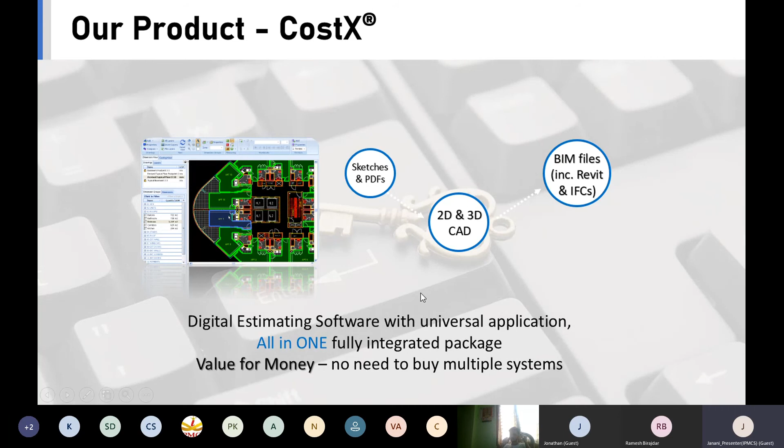Now we'll see a glance of CostX. iTWO CostX is a flagship product of RIB, a complete 2D and 3D BIM estimating solution. CostX is a digital estimating software with universal application. We can call it an all-in-one single integrated platform solution, because here we can combine our complete estimation work right from quantity takeoff, creating rate buildups or rate analysis, towards the estimate. CostX supports both 2D and 3D files. Features of CostX include 2D measurement, BIM takeoff, auto revisioning, estimating workbooks, and report writer.

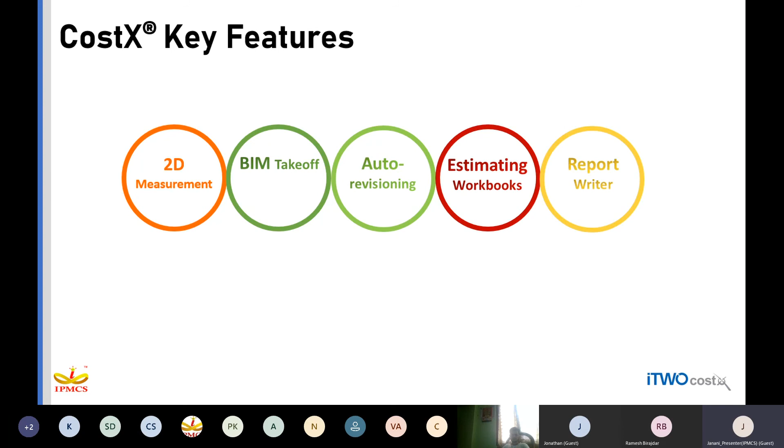CostX is a complete solution which is compatible with other tools also. First we'll see about drawings. CostX supports both 2D and BIM models for our quantity takeoff. For 2D drawing, CostX supports PDF files, AutoCAD files, and image files such as JPEG, TIFF, PNG, GIF, etc. For BIM models, CostX supports two extensions, IFC and DWF. In addition, RVT file is also supported in CostX, which includes models from ArchiCAD, Tekla, MicroStation, Revit, Navisworks, SketchUp, etc. So these files are supported in terms of 2D and 3D models.

Once we are done with our estimate, the same estimate can be exported to Excel, and we can also generate a report which is exportable to PDF, RTF, HTML, image files, CSV or Excel file. When we want to prepare an estimate, we can prepare a rate library inside CostX, which can be automatically imported from Excel. So if we have our complete project rate list in Excel, that can be automatically imported, which will be helpful for preparing our estimate. CostX is a complete estimation solution which helps us to streamline our process from the initial conceptual stage of estimation till the handovering stage.

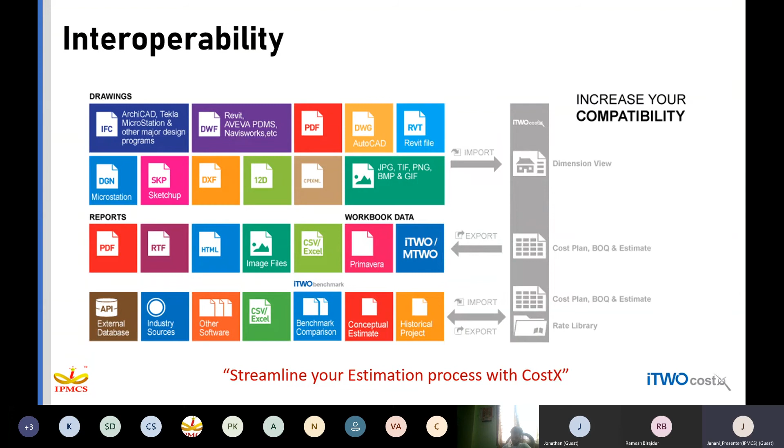Today's topic is earthwork volume, how to calculate earthwork volume in iTWO CostX. We have different methods of excavation which depend upon the type of project and type of soil. Some categories are pocket or borrow excavation, useful for foundation, mass excavation for a larger area, trench or channel excavation, rock excavation, underground excavation, and topsoil excavation. Today our focus for calculating earthwork volumes is going to be with mass excavation. If we are going to do mass excavation, we'll cover two different ways: one is using the grid line method for mass excavation, and another one is using the slope cutting method.

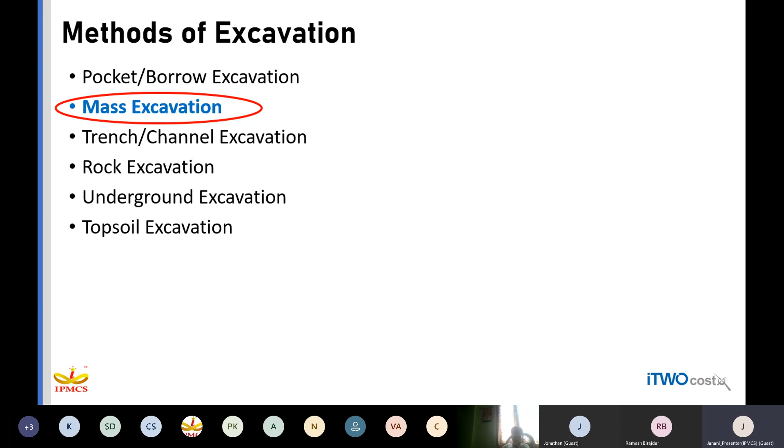First, we'll see about the grid line method. When we are going to do our mass excavation using the grid line method, we'll receive our drawing, which will display our complete site information with contours, which depicts the topography of the ground level of our site. In addition to the topographies with contours, we'll also get information such as grids. Our site layout will be bifurcated into different grids with different sizes, which will depict the ground level at each and every different RLs.

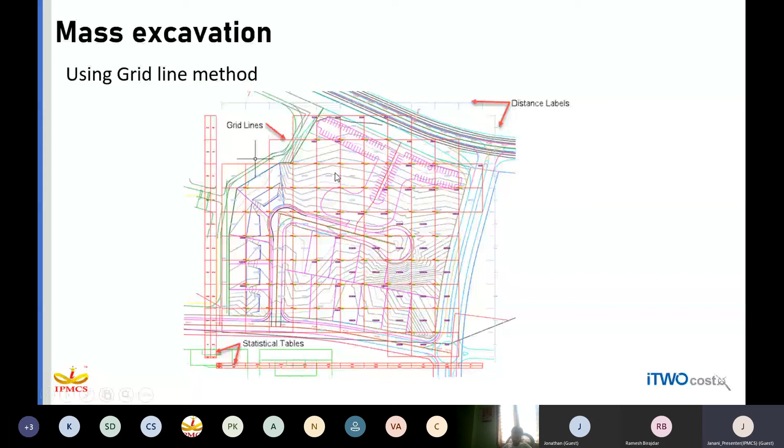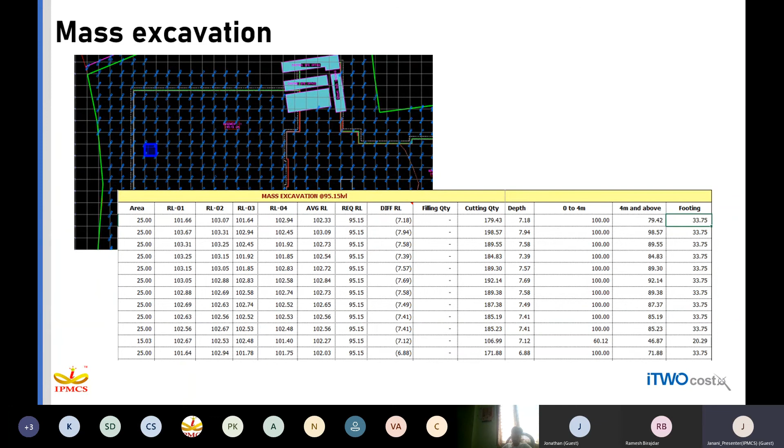This is how our grid excavation drawing will be, and we'll be doing the same in Excel. So let us see first how that can be done in Excel. I'll have a grid drawing which shows the complete site layout with grids separated. So when I want to prepare the same excavation quantity in Excel, I'll just move to Excel.

What I'll do is I'll categorize my grids starting from 1 till the end of the grid. So I have to categorize as grid 1, grid 2, and I have to measure the area of each grid, most probably which will be the same. And I have to take an average reduced level, which is RL, which will be an average of RL 1, 2, 3 and 4. And I'll have a required RL based on the site information.

So we'll have to calculate the difference in RL. With arriving at the difference in RL, difference in height between two different RLs, we have to find out whether it is a cutting volume or filling volume, so the excavation quantity we are going to calculate. Based on that, again we have to bifurcate the soil we are excavating based on different depth, like 0 to 4 meters, 4 meters and above, because the costing also will differ. The excavation costing also will differ.

So what we'll do in Excel is we'll include this area. Then from the AutoCAD drawing, we'll include 4 different RLs, and we'll be calculating the average one. Then we'll be assigning the formula which will be different for cut and fill quantity. Based on that, we'll arrive at the total quantity of cut and fill, which will be the total excavation quantity.

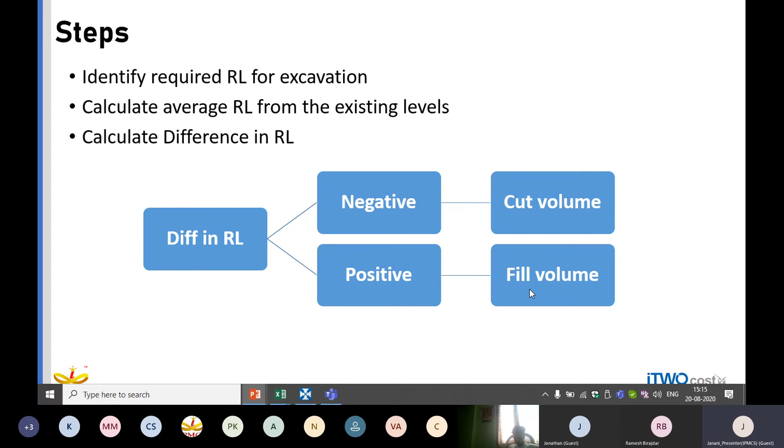So the same we'll see how to do in CostX. The steps we are going to follow in CostX are also, first we are going to identify the required RL, which is here in Excel entered as 95.15. Then we are going to calculate the average RL based on the 4 different points, and we are going to calculate the difference in the 2 RLs. If the difference in RL we are getting is negative, then the quantity we are going to calculate will be the cutting earthwork volume. If it is going to be a positive value, then it will be a fill quantity. So to arrive at this cut and fill volume, you are going to assign different formulas in CostX.

I am going to CostX. This is my entire site layout, which is bifurcated with different grids and different RLs. If we take a single grid, it will have 4 different RLs at the corner points. By measuring the 4 different grids with 4 different points, we will be able to calculate the total earthwork volume for the entire site layout.

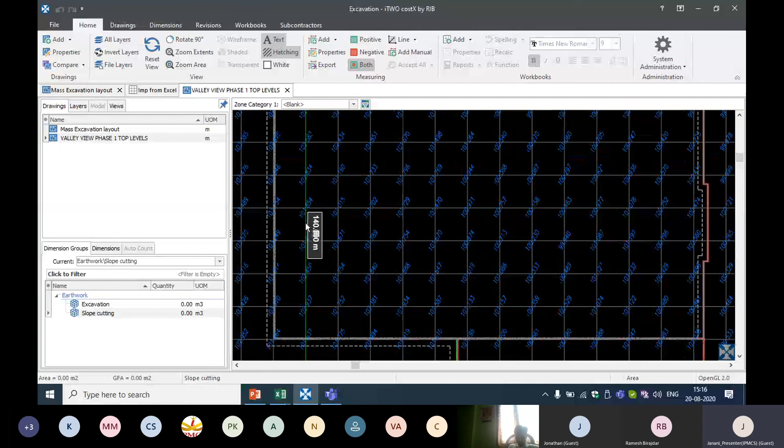So for calculating the difference in RL, we need to have cumulative information of the entire RL which is given in the drawing. What I have done is, I have prepared an Excel sheet which is going to be my entire RLs given in the grid drawing, and entered them in Excel. This is a one-time information. This RL either we can prepare, or if possible we can collect it from a drafting person or the consultant of the excavation drawing.

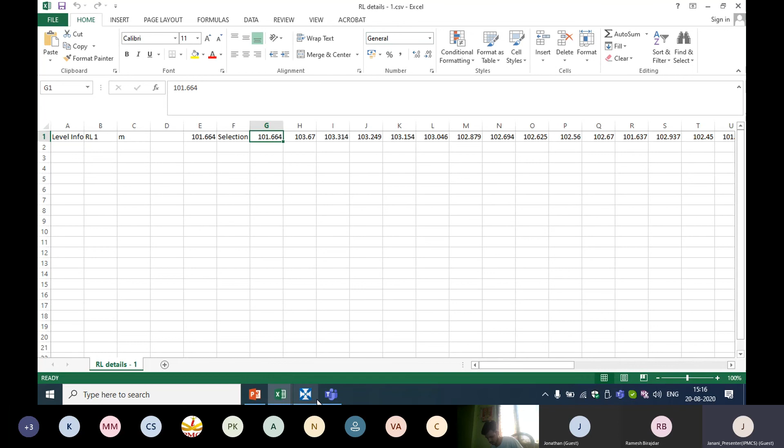After preparing this content in Excel, we can save this content in a CSV format. We can note it down. We can save this in a CSV format. After saving it in a CSV format, we can go to the standard variables option. So here I have saved those RLs. You can see this is my RL information. This gives me complete RL information. So I'll be saving the complete RLs given at different points in CostX under standard variables.

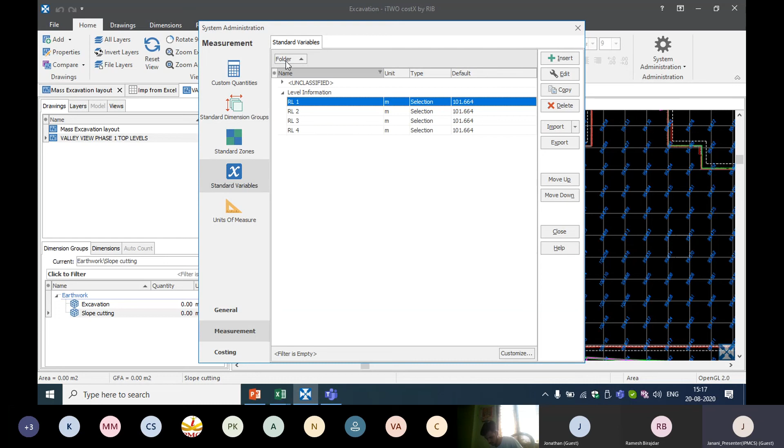So I'll be importing it directly from the Excel. After importing the RLs from Excel to CostX directly into variables, I'll start preparing the predefined template for calculating the excavation quantity. So I have created a folder as earthwork under which my dimension group name is excavation. Since I'm going to measure the grid of different grids, I have given the measurement type as area and default display as volume. So I haven't entered the width or height.

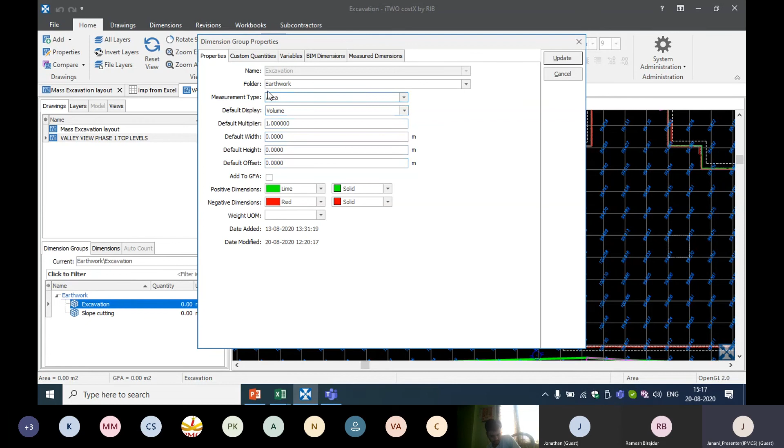Under custom quantities, I had taken 13 different custom quantities. This is a one-time predefined template creation, which will ease our quantity takeoff.

I have given RL 1, 2, 3, 4, from which I'll calculate the average RL. Required RL will be entered manually, and difference in level, difference between average and required RL, from which we'll calculate the cut volume and fill volume. Based on the cut or fill volume, we can again bifurcate our quantity based upon volume up to 2 meters, 2 to 4 meters, 4 to 6, or after 6, to bifurcate as per our BOQ specification.

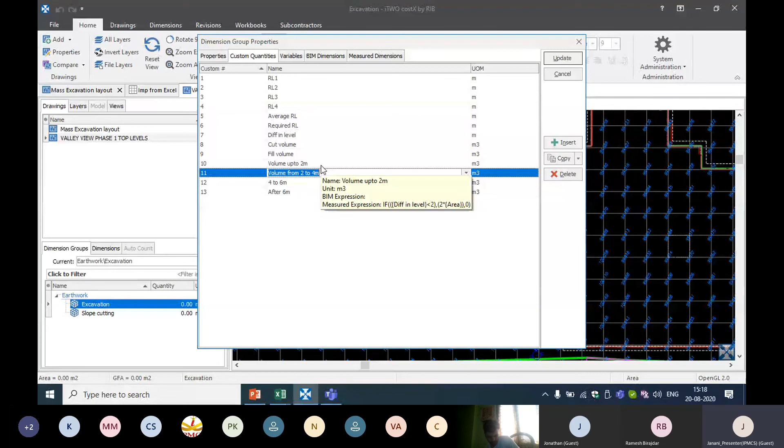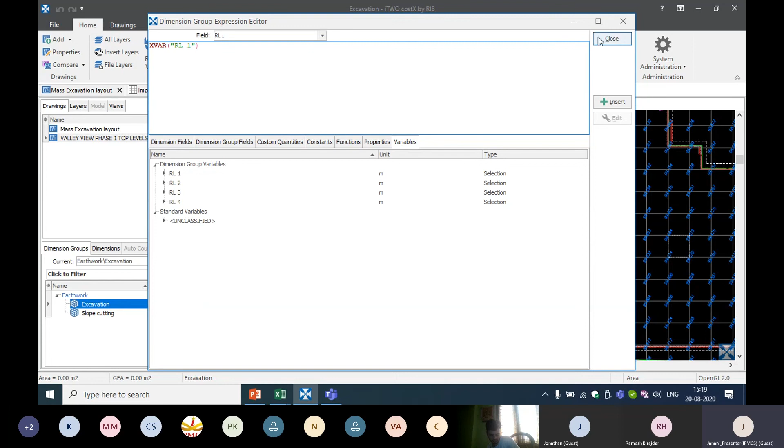Once I prepare this custom quantity, I'll go to the measure dimensions tab. Under RL1, I didn't type any RL, I am just going to link the variables. We have imported our Excel into CostX into standard variables, so those variables I am just linking here. For RL1, RL2, RL3, for 4 different RLs, I have linked the variables. I have not typed the RLs.

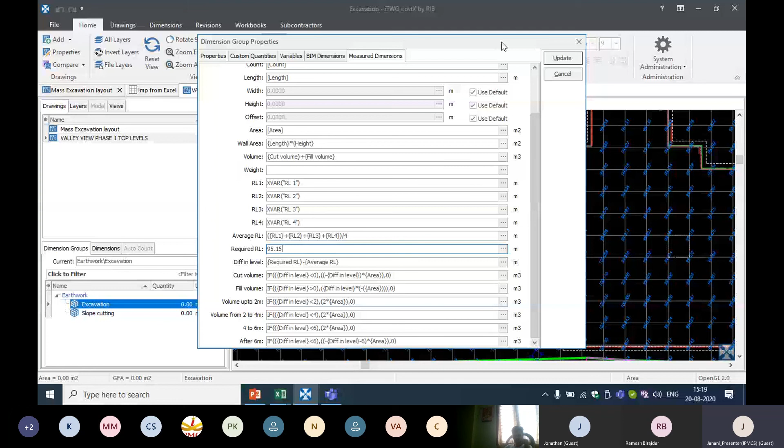From which I have applied the formula for calculating the average RL, and the required RL from my drawing is 95.15 meter. The difference in RL will be required RL minus average RL. Then for calculating the cut and fill volume, if the difference in RL I am receiving is less than 0, if it is a negative value, then the quantity I am calculating is a cutting earthwork quantity. If it is greater than 0, then it will be a fill volume. Again, the volume, either cut volume or fill volume, I have bifurcated up to 2 meters, 2 to 4, 4 to 6, after 6, by applying formulas. So we can see here.

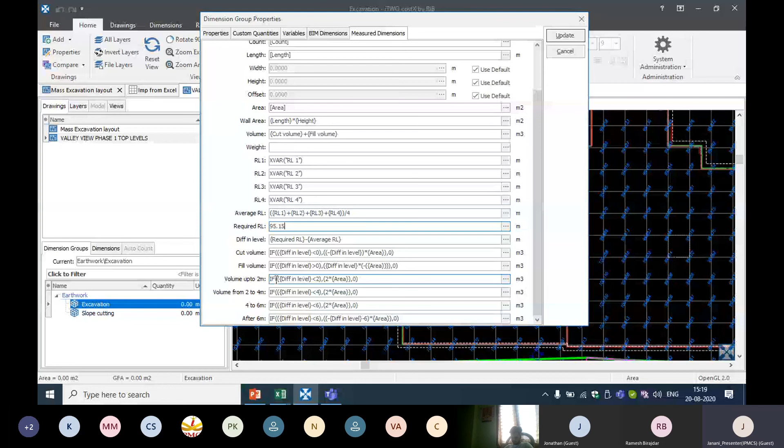This is a one-time predefined template for excavation what we are creating. After preparing this template, I'm going to measure my grid. Say the first grid, I'll take this grid using shift.

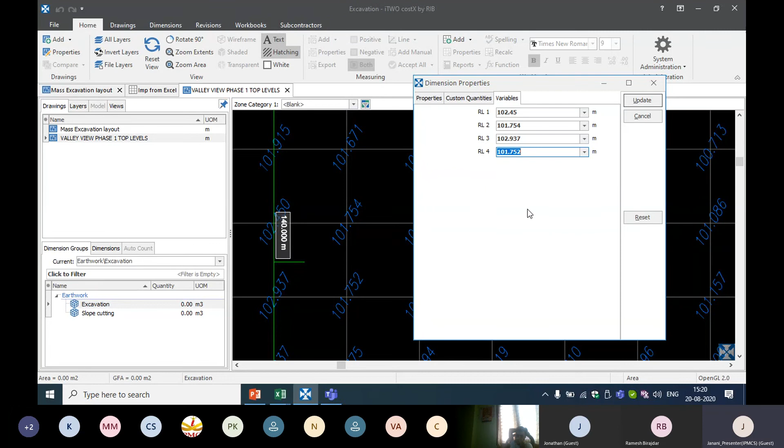I'll click here, and now you can see the 4 different RLs here, which is 102.45. If we just type here, it will be listed down and you can see the complete RLs. Rather than typing manually from the drawing, from the drop down we can select. I'm selecting the 4 different RLs for this particular grid.

After that I'll choose update. So you can see, in a single click, after entering all the 4 different RLs, we got the information for that particular grid, which is RL1 to RL4, average, required RL, difference in RL. For this particular grid it is minus 7.07, which indicates we have to cut our soil. That is why here it is showing as cut volume, and based upon that cut volume total 176.83, it has bifurcated according to the level wise, up to 2 meter, till 4 meter, till 6 meter, and after 6 meter.

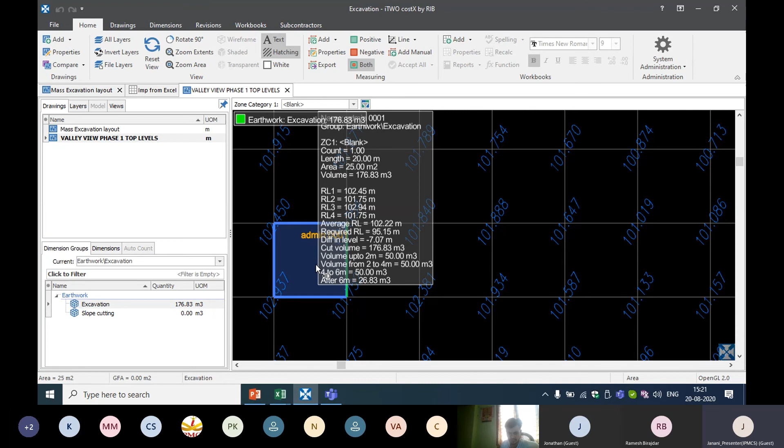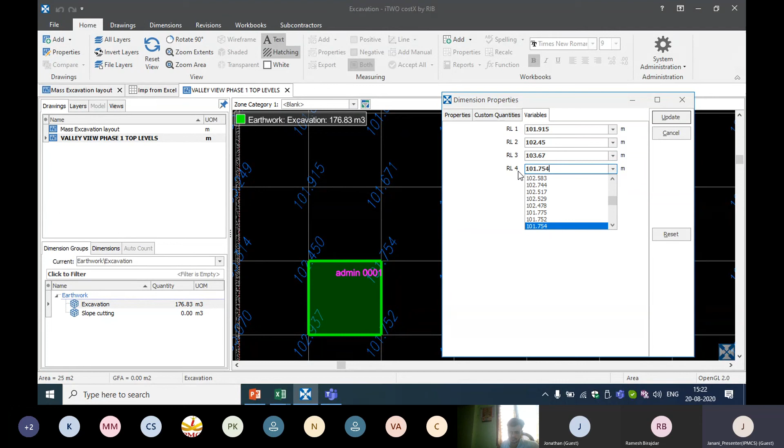The same way I'm going to select the next grid using shift. I'll select the grid, then select the RL here. From the drop down I can select 102.45, 101.671, 0.754. I'll select from the drop down and update.

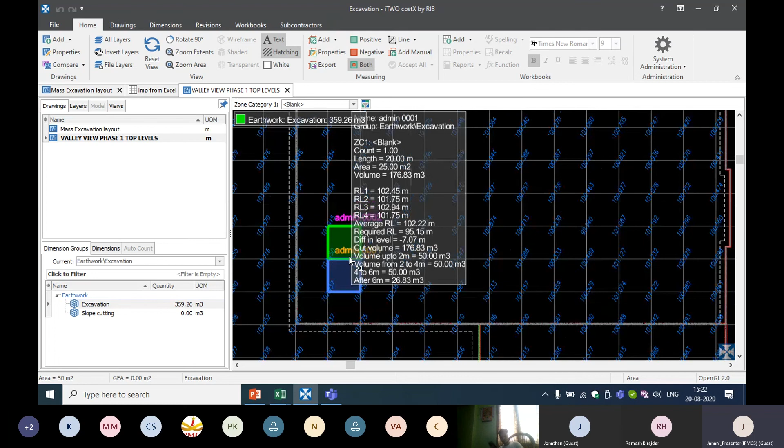Here we'll get a track of which grids we have done, and if we have made any mistakes in entering the grids, we can cross check easily. This is a time taking process with the conventional estimation of doing it with Excel. Here we'll get a track of which grids we have covered, and which all has yet to be covered for quantity takeoff. The same way I'm clicking here.

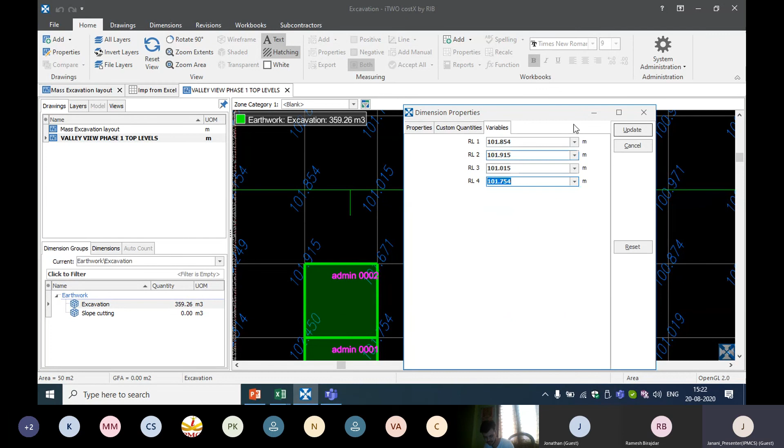Since the entire ground quantity is above 100 in my drawing, the quantity I am calculating will be a cut volume. So just to assume, instead of my required RL of 95.15 which I mentioned in the dimension group, I am choosing the same quantity to be the same required RL as 102 or 104 meters. Just for an example, so I'm going to change this excavation dimension group.

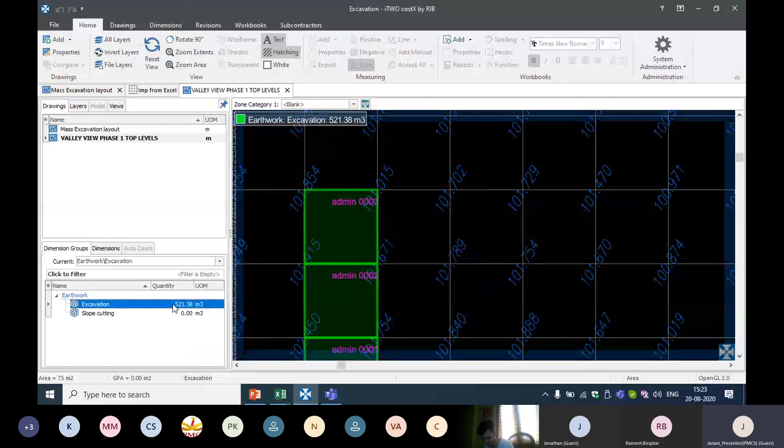So I'm editing the property of the dimension group here under required RL. As here it is 95.15, I'm going to make a small change to 104, just to show you how the quantity will automatically change it to fill volume. So now 104 is a required RL.

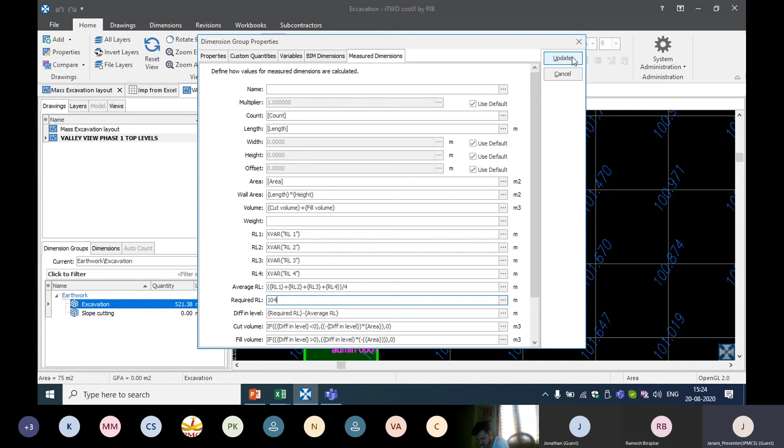Here also you can see excavation quantity total, it is 521. Instead of that I'm updating now. If you see here, the quantity will be automatically changed to fill volume, and your quantity is also in negative, which indicates we have to fill the quantity.

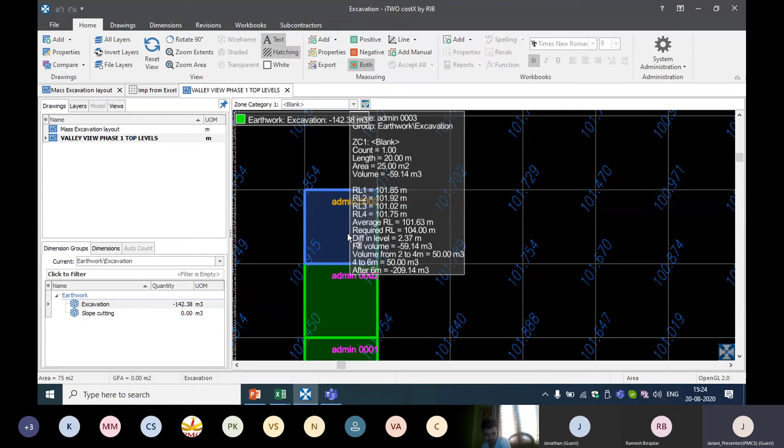So in this way, just by assigning the formula one time, like how we do in the conventional way, we can create this template, the dimension group one time by inserting the formula. After which we can just trace out the areas of the grid directly from the drawing, and it will give us complete information.

What is the cut volume? What is the difference in RL? So you can see complete information. Just tracing your grid and entering, selecting your 4 different RL points from the drop down, will save your time in quantity takeoff.

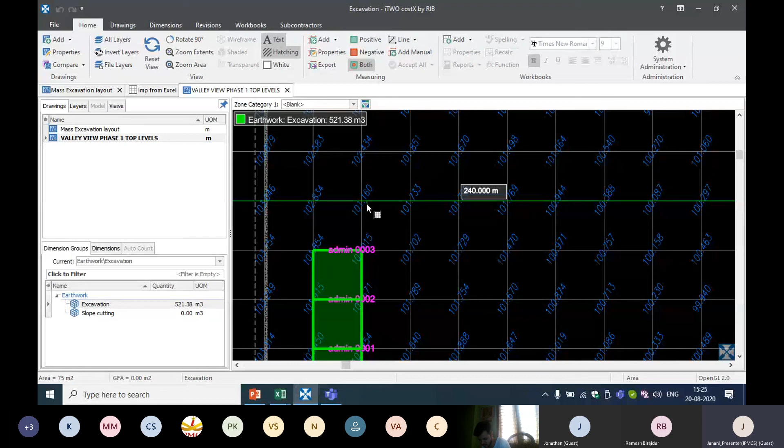Even after, if you want to cross check your RL information for each and every grid, it will again be an easier task for you to cross check. So this is about grid line excavation.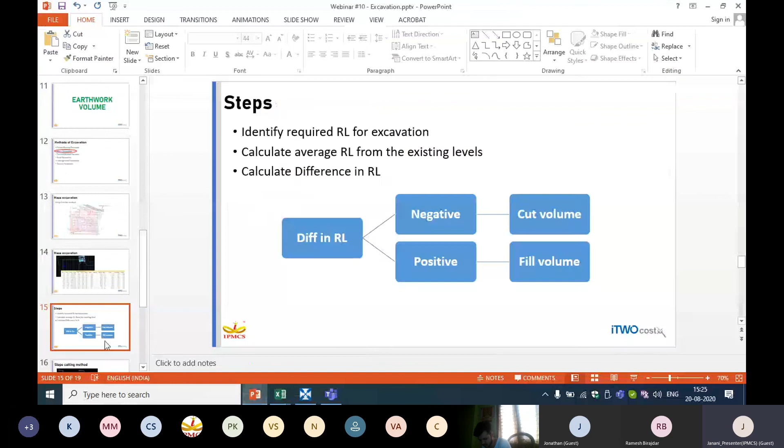Moving to our presentation, next is about the slope cutting method. In addition to the mass excavation with grid line method, we'll have our slope cutting method also, so that we'll excavate our quantity which is beyond our retaining walls.

We'll receive our drawing indicating the slope for different sections and indicating the length of the slope also. So again we have to manipulate the formula in Excel. Now we'll see how this is done in Excel and how this is done in costX.

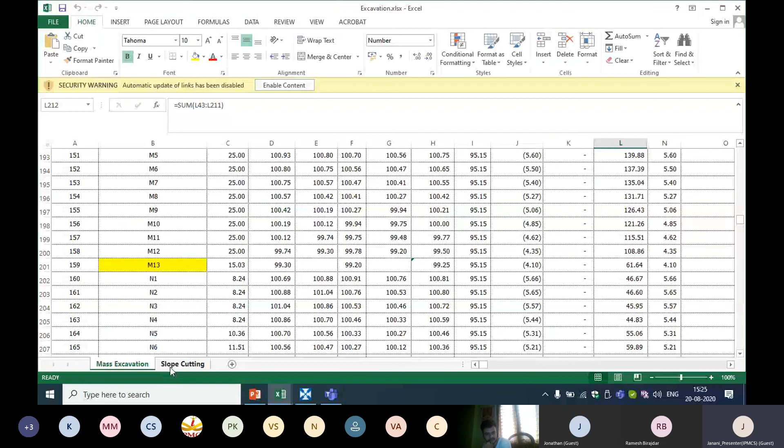Moving to Excel. So here is a slope cutting method formula I have applied in Excel. I have to categorize it section wise and I have to measure the length of the slope from the AutoCAD drawing, and I have to enter the slope from the AutoCAD drawing.

I have to measure the degree of slope, and from that slope again I have to calculate the average height by inserting a formula, and average RL also, then average of first slope, second slope, and I have to again find the base quantity, base of different slope.

So from this calculation of height and base, to calculate the excavation quantity, I will be applying the formula for triangle, which is like half BH. After applying this much formula, we will arrive at the quantity for excavation.

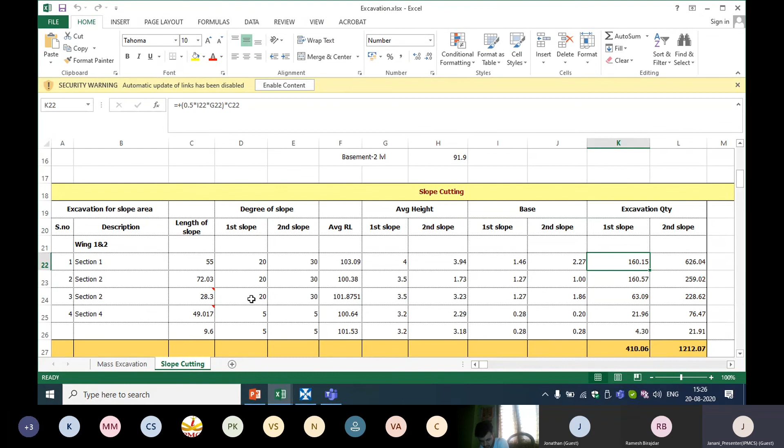This same slope cutting quantity can be calculated easily in costX. So the same slope cutting quantity - I have created a dimension group.

So again under custom quantities, I just entered the sloping length as the perimeter, and in measured dimensions I have entered the formula as the area which I am going to measure, the sloping area multiplied by length. Length is the sectional length of the particular slope.

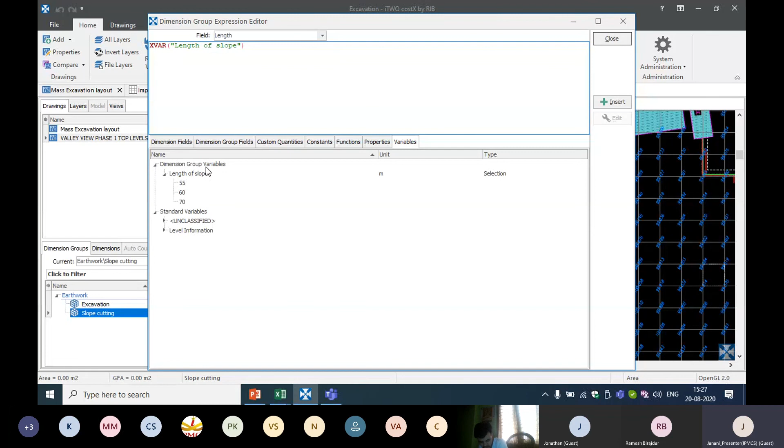Again the length of the slope, I don't have to measure manually each and every time because I'll have the information. So those lengths of different sections of slope, I have created here under dimension group variables just by inserting. So you can enter your complete length of slope. Say I have just taken 3 different measurements, like one is 55, 60, 70.

After entering it, the length of the slope I have linked to the length field. So this length multiplied by the area of the slope, what we are going to measure directly from the drawing, will give us the complete excavation quantity for the sloping one.

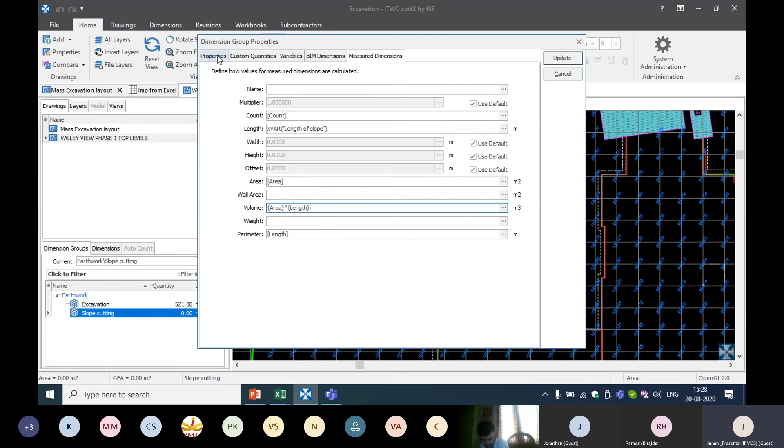So again the measurement type I have chosen as area and default display as volume. Update. So my sloping drawing is in another layout - this is a site topography layout with contours, and here is my excavation sloping section.

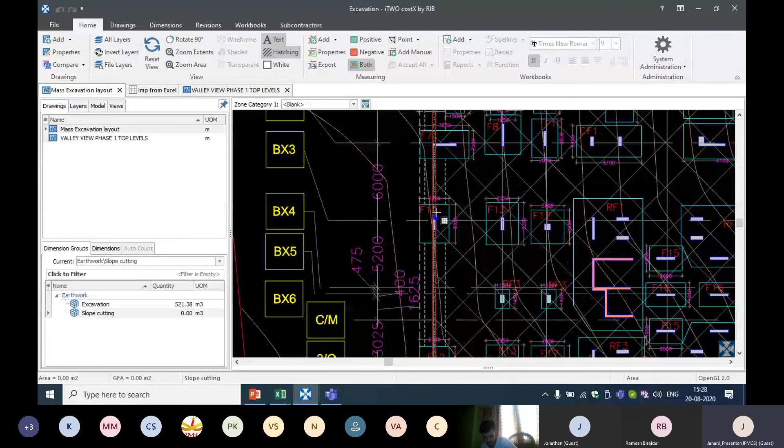Say this is section 1. So here you can see, here I have the section 1. This is what the section 1. The section 1 length is what, 55 meters.

So if we measure the distance, we'll get to know what is the length of the section. I'm taking from retaining wall end to end. Say it's 55 meters.

So now what I'm going to do is, after creating the dimension group, I'll select the slope cutting dimension group. I'll start measuring the area of the sloping portion directly from the drawing. So instead of applying multiple formulas to convert degrees to radians, I'll start directly measuring here.

So I'll measure this area in just a few clicks.

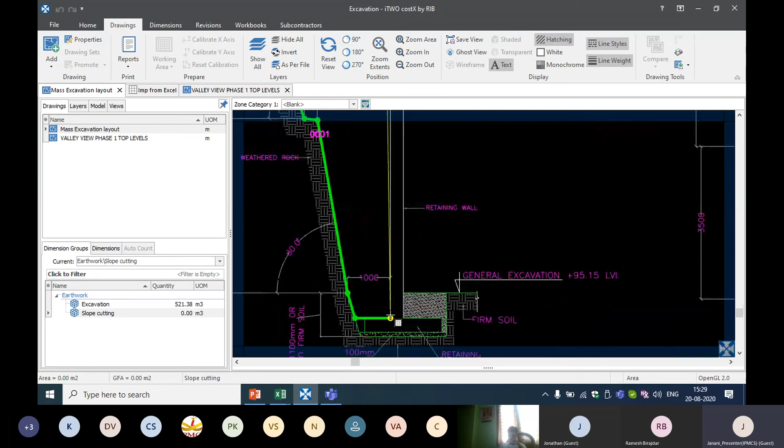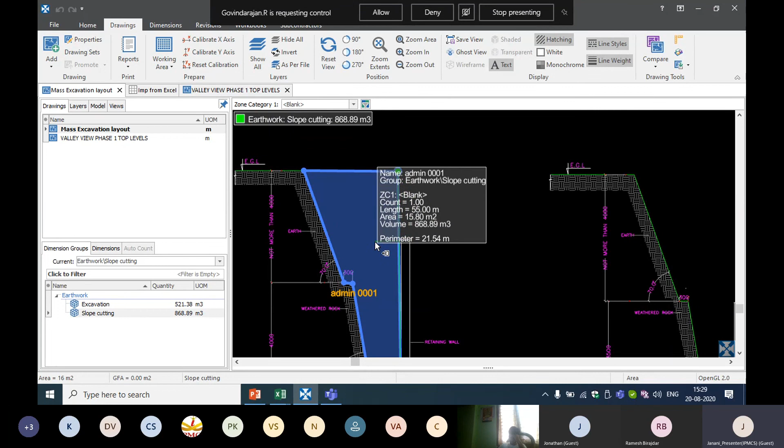So here, as we have linked the length of slope, you can see 55 meters. You can choose from the drop down and select 55 meters as the length of the slope. Now the measured sloping area multiplied by length of the slope gives the volume. So I'm updating it. So now you can see the volume is 868.89 meter cube. Length of the slope, as we have chosen from the drop down, is 55 meters, and area of the measured portion is 15.80. The same way we can start measuring the next sloping area.

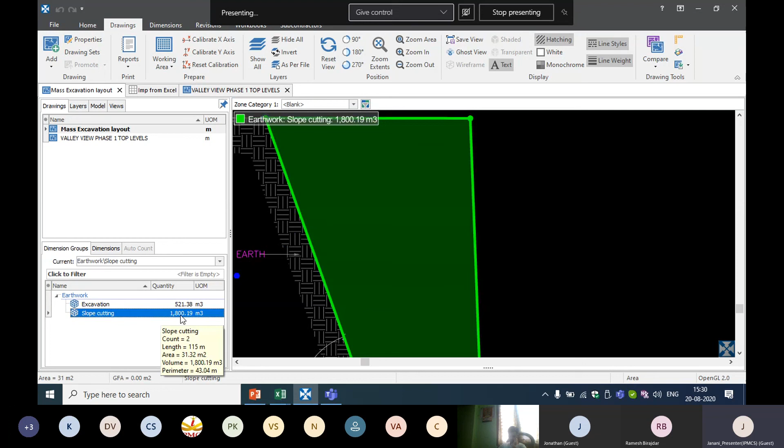So again, we can save our time, and quantity can be cross-checked easily since we are tracing directly from the drawing. So from the drop down, I select the length of the slope. So this is 60 meters. This section 2 length is 60 meters. So now this volume is 931. So here we'll get the total slope cutting volume, which is 1800. Total cut volume, since we have measured just 3 grids, here we can see the total cut volume is 521 meter cube.

So now when we want to link the same in our BOQ, I'll just show you how to link in BOQ. I have taken BOQ, which is directly imported from Excel. So here I have the first line item, which is earthwork in excavation. So I'll choose the subtotal one. Here, as per my BOQ convention, I have bifurcated my dimension group quantities, say my excavation is classified as up to 2 meter, 0 to 2 meter, 2 to 4, and 4 to 6.

So now when I want to link the quantity, I'll just drag and drop it here. So from the drop down, I'll directly choose volume up to 2 meter, which is 150. Same way again, drop down. Now I'll choose the quantity which is 2 to 4 meter, and again 4 to 6 meters. So if we want, we can include a line which will show above 6 meters. So I'm inserting a row. So this is above 6 meter. So I'll directly link. From the drop down, I'll select quantity above 6 meter, which is 71.

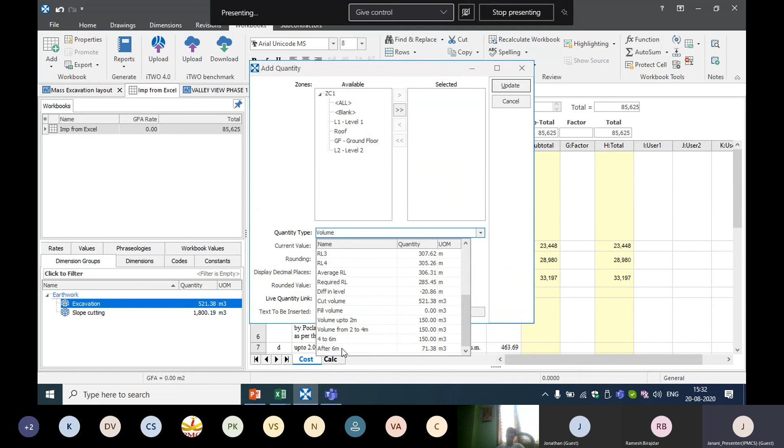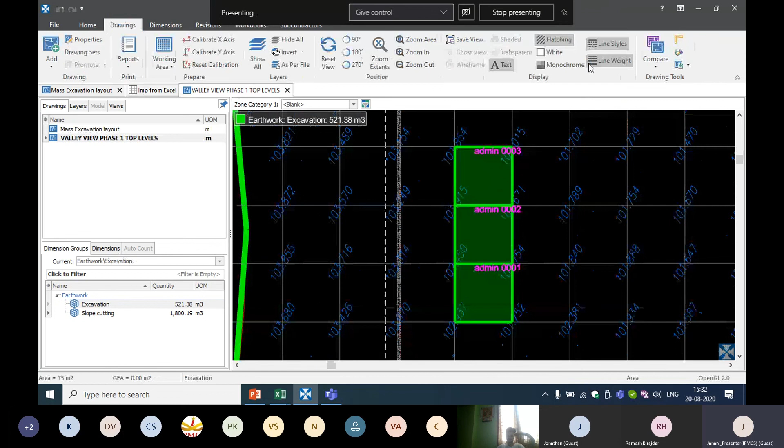Now our complete information for earthwork with costing is 1,01,422, which gives us the rate, and the quantity whatever we have linked from the dimension group is linked to our excavation drawing. By giving show source, at any point of time you can see your drawing and you can cross check your drawing also with the RL. Since we have linked every quantity, linked the area, linked the RL, our quantity information is again linked with the estimate. So this is how we streamline our excavation quantity, right from measuring the grid, RLs, and populating into the estimate.

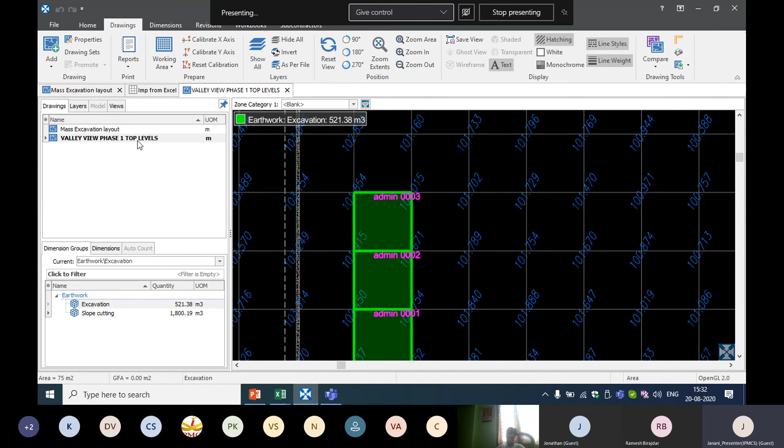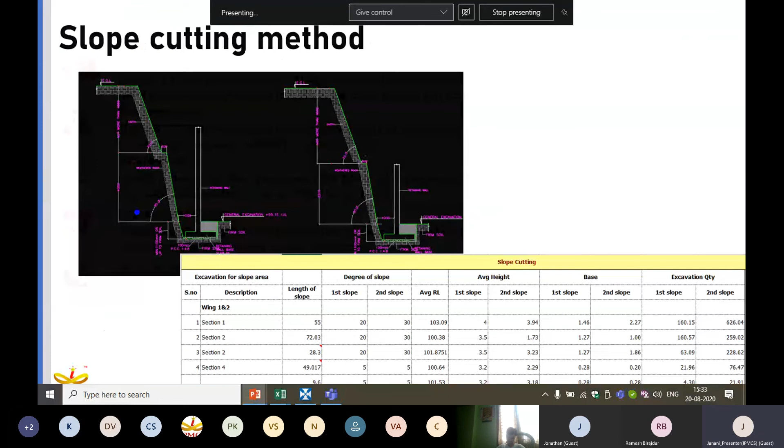Moving back, so this is our first heading. So we have seen excavation with grid line and slope cutting method. So moving back to our presentation. So we have completed estimating earthwork volume with CostX. So we'll see what are the benefits of CostX.

So as I told earlier, we can save our time with CostX as it is a completely integrated estimation and takeoff solution. So it helps us to get the job done quickly and accurately. We can eliminate our errors. It has an auto revisioning facility also. And CostX is future proof as it supports 5D BIM. We can impress our clients with professional reports for our BOQs and cost plans. Since this reduces our paper dependency, we can eliminate the clutter. And as it is working on an advanced platform, which helps us to have breakdown estimates in specific detail, we will not be missing any quantity or any line item in our BOQ.